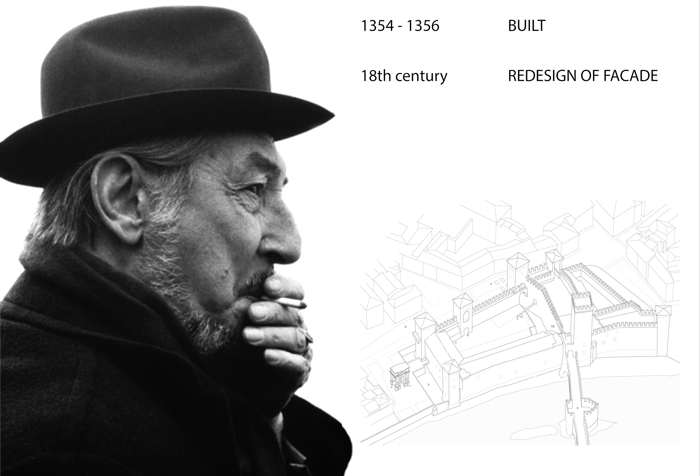In the late 18th century, the facade along the river was redesigned in a neoclassical way, breaking with the medieval style of the building. In 1925, the Castelvecchio became a museum under the orders of Antonio Avena and architect Ferdinando Forlati, and has been a museum since. This technical report, however, mainly focuses on Carlo Scarpa's intervention in the 1950s.

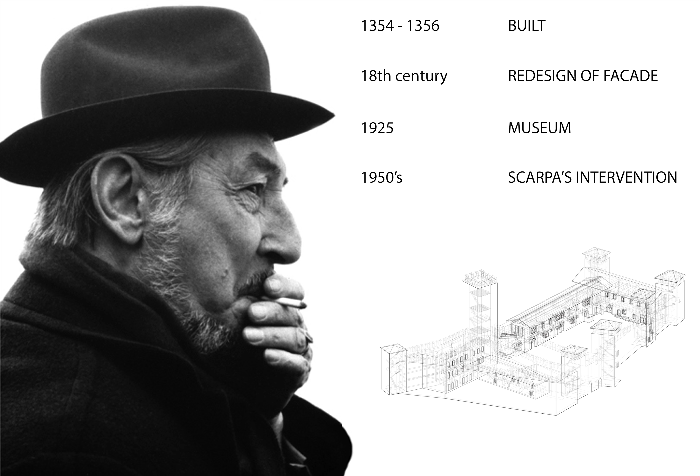During the Second World War, most of the building along the Ponte Scaligero was destroyed due to bombings. The bridge was rebuilt as it was before, however Scarpa was more daring in his preservation and intervention. His use of modern materials and the detailed approach to design create this additional layer to the heritage of the Castelvecchio.

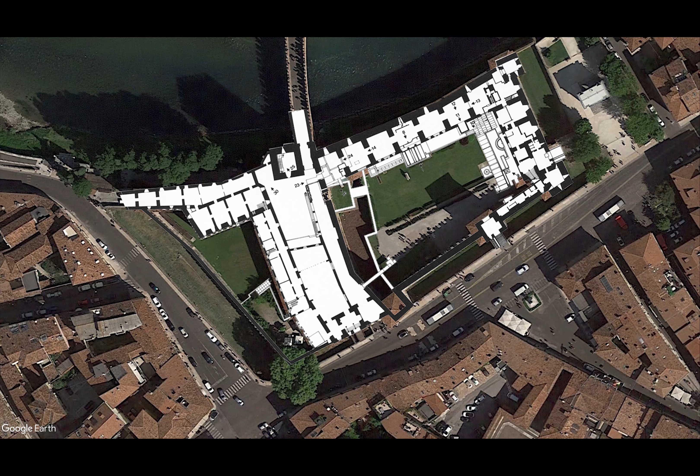Located at the heart of the city, the Castelvecchio really holds a strategic position. The now museum's relationship with the bridge is crucial, and this can be seen through the lines dictating the form of the building. Scarpa's intervention can be found throughout the building, however this report will only focus on this section, which is the heart of Scarpa's intervention.

In terms of materiality, the exterior of the building, facing the street and the river, really ties into the context of Verona, a medieval and Renaissance-style city. Passers-by would be right in assuming the building is a medieval fortress dating back to the 14th century.

However, as one steps into the internal courtyard and admires the internal facades, Scarpa's intervention truly stands out, especially in the section analysed. It is interesting to note the differentiation that Scarpa carried out for the preservation of the Castelvecchio. Scarpa's approach to preservation and architecture was different from Forlati's restoration taking place in 1923.

Forlati, and the museum curator Avena, provided the castle with a historical mask to convert it into a museum. They plastered the barrack front with a collage of Gothic finds and converted the whole fortified section into a palazzo.

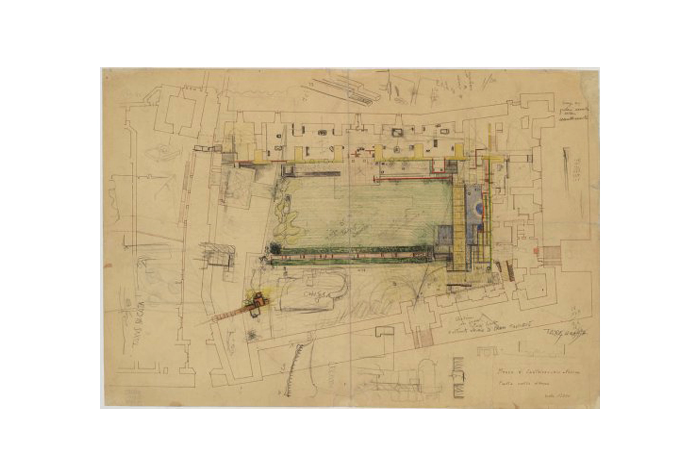On the other hand, Scarpa was interested in distinguishing between the old and the new, highlighting the different layers and eras of architecture. Therefore, when Scarpa was commissioned to redesign the building, he decided to introduce some vertical elements to break up the symmetry of the building.

In his view, the Venetian form of Gothic architecture was not symmetrical. He therefore moved the entrance away from the centre, then reorganised the windows, which weren't related to the background anymore, but to the internal wall.

Although sustainability of the building was not generally considered in the 1950s, natural daylighting was a crucial aspect considered by Scarpa. His openings, especially on the south side, framed the position of the artwork inside, as well as the way in which light comes into the space.

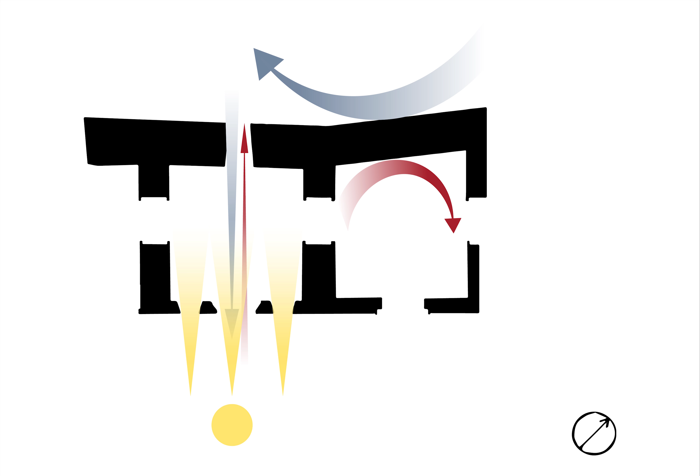We can see that the northern walls are a lot thicker than the southern ones. In effect, this means that the sheer width of the wall acted as insulation. Furthermore, small openings fill the northern facade, whereas larger openings fill the southern one, allowing southern light and solar gain through these enlarged openings.

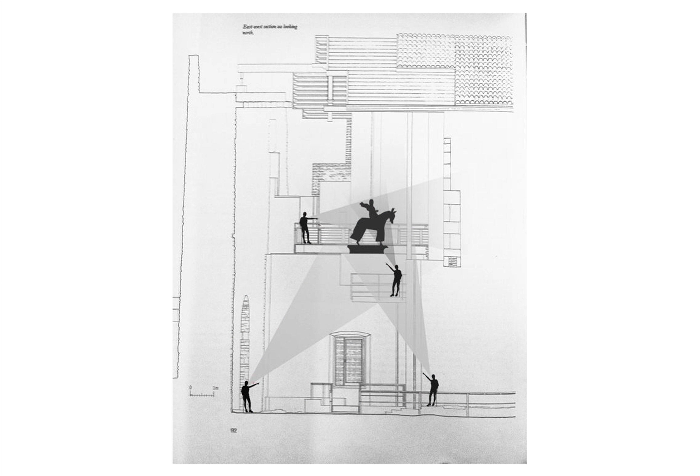The north opening and the shallow depth of the space allows cross-ventilation, which effectively decreases the demand of mechanic ventilation. Scarpa completely demolished a narrow strip of facade so as to expose the different hidden layers of the building. This became a place of synthesis of the whole structure, emphasizing it with the Can Grande della Scala statue.

The structure created by Scarpa clearly shows this juxtaposition of old and more modern elements, and this is very much so evident when looking at the roof structure. The new copper roof extends above the statue, as well as the beam supporting it, adding a layer to the language of the facade and interpretation of the history of the Castelvecchio.

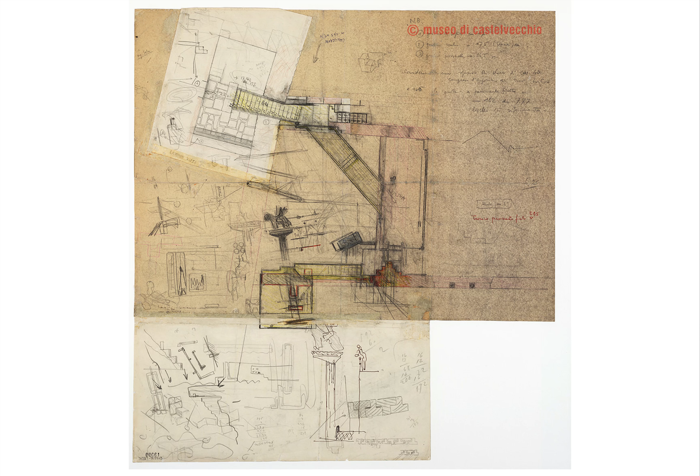This, in effect, acts as a historical timeline and preservation of the Castelvecchio through the use of materials and the atmosphere created. Scarpa wanted to make history come alive by a well-ordered juxtaposition of the fragments, having a dialogue between different materials from different historical eras, placed close but apart at the same time.

A good example is the newly laid floors set as a carpet, which were stopping for some distance short from the walls. The walls, in turn, stop short of the ceilings. At the same time, these separations allow space between visitor and the painting. The gaps also act as the frames of the floors.

The floor is slightly altered, hence, when visitors come into the space, they would gain a feeling of floating out of the room. The weaving pattern on the door is inspired by Japanese aesthetics, and Scarpa was well known for his admiration of Japan. Sliding doors being the most popular door type in traditional Japanese architecture, Scarpa used a similar approach to openings in the Castelvecchio.

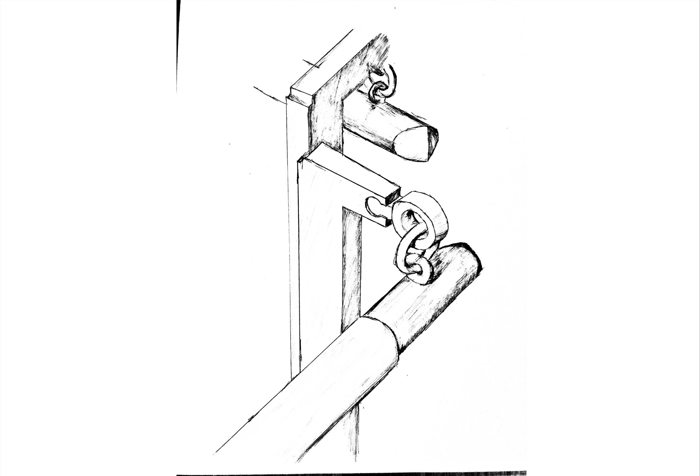The handrails are made of steel and wood. As we can see, the wooden banisters are supported by steel rings, in turn attached to steel fixtures. This design originates and ties to the idea of floating in the space that we can find in his architecture and other rooms in the Castelvecchio.

The handrail also serves a purpose for the spatial arrangement. As the rooms were all redesigned for displaying sculptures and drawings, the handrails guided the visitor's way through the space. For Scarpa, museum architecture is therefore not simply a way of housing artworks, nor is it a display machine. It is a critical tool that makes art accessible and understandable.